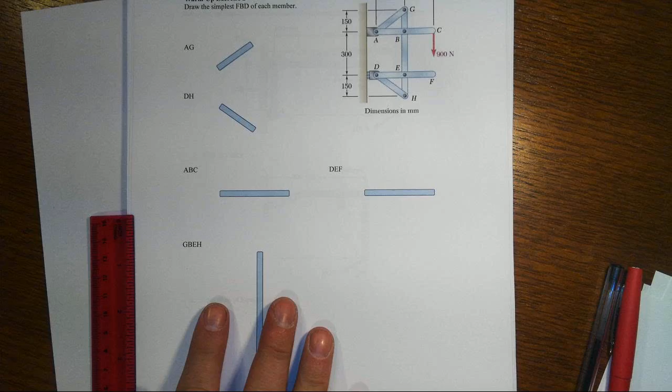Alright, in this next warm-up exercise for frame and machine analysis, we have a pretty complex situation here. We've got 1, 2, 3, 4, 5 members that are all pin connected in a fairly complex arrangement.

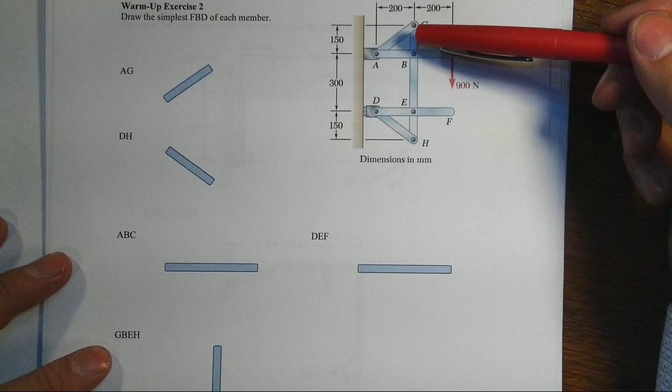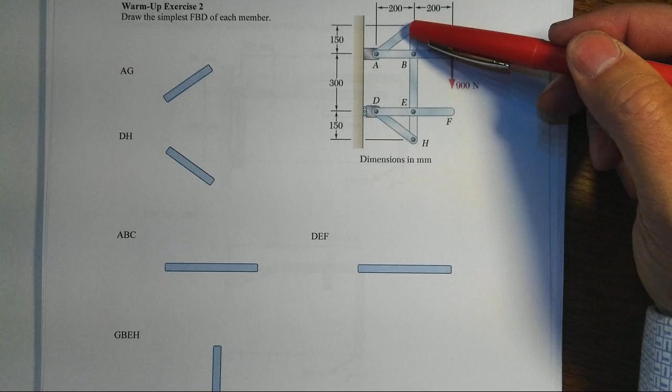Now it's 5, not 6 or 7, because this vertical member GBEH is not joint to joint to joint, but one long continuous member, which is suggested to us by not seeing little circles that indicate member GB just stops there. It is suggested that we've got these overlapping situations, the straight lines going all the way through. The subtleties of these drawings will be crucial in your interpretation of the system.

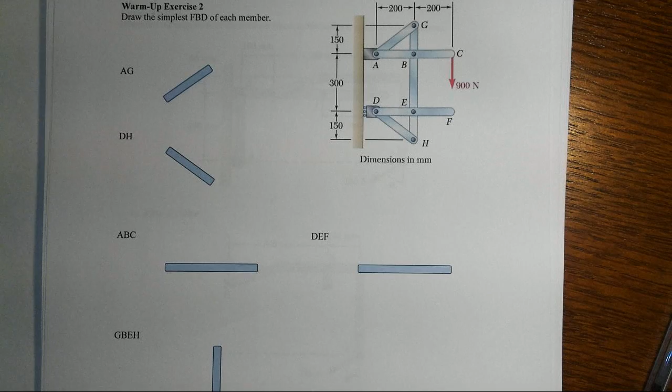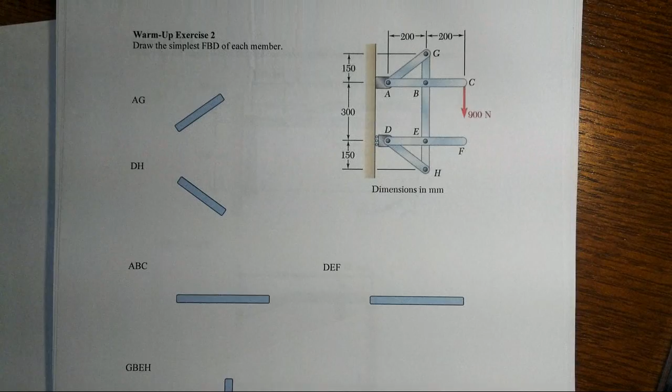And indeed, any other way to try to interpret this system, you'll end up with a system that's not stable. So we actually have 5 members, and you see down below 1, 2, 3, 4, 5 members are shown, and we've got to think about starting to pull these pins and trying to figure out what's going on.

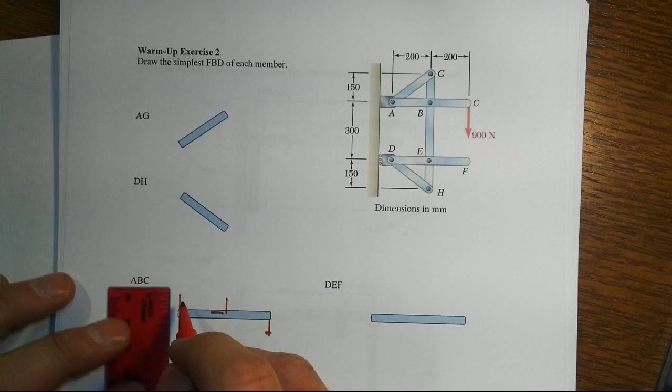I suggest we start with member ABC because that's where the load is applied, and we're going to do a variety of things here. We're not just going to come along and say well at B there's a pin, so we'll put a horizontal vertical component. We can do that, but I don't know what direction they are, so let's try to figure out what some of these directions might be.

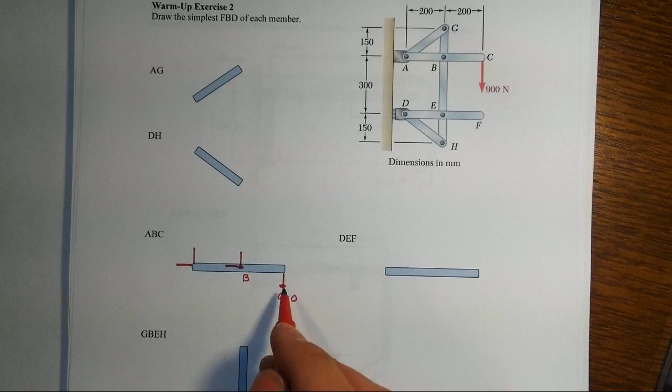For instance, if this is point B and I sum moments about point B due to this 900 Newton load, then I know, given the equal moment arms from A to B and B to C, that this force over here at A also has to be 900 newtons going down.

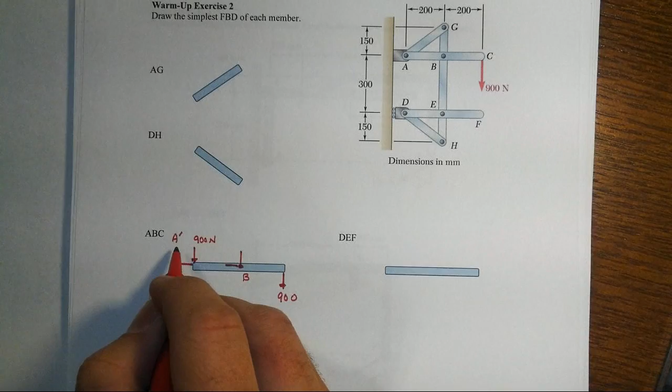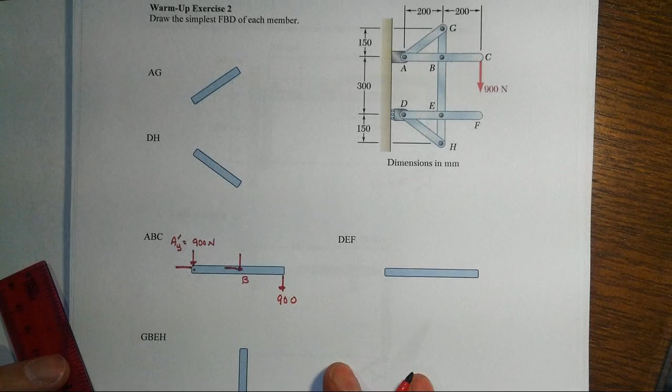Now that is on the end of the member, not at the joint itself. Really close, but not quite. You'll see that in a second when I look at this reaction at A about why I'm calling it somehow a little bit different there.

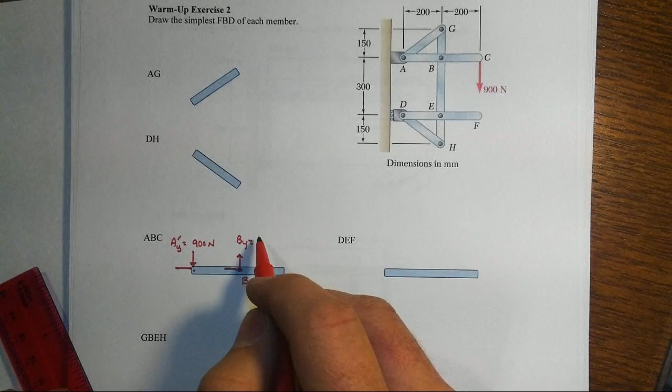Now, I don't know what's going on with the two X components here other than I know they're equal and opposite in direction, but I'm just going to leave that go for now. But note here, sum of forces in the Y, or you could sum moments about point A, you could find out that BY has to be equal to 1800 newtons.

And you say, well, why didn't you call that BY prime? Well, because in this case, with GBEH, this B is not a support. It is just a pin that goes in between two members.

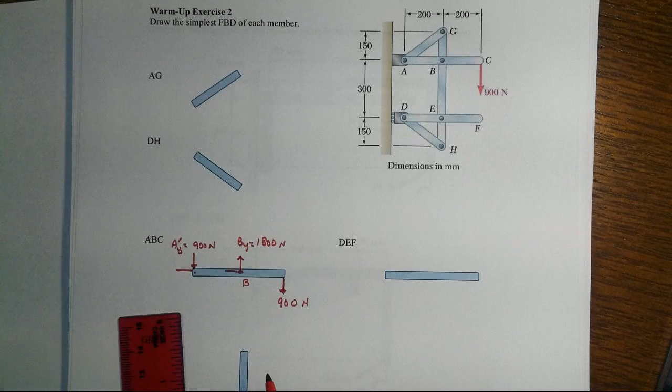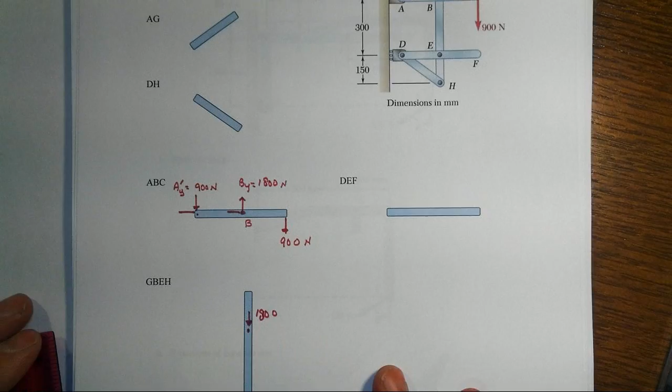And I'm going to come down here immediately to point B on this long vertical member, and I'm going to turn this 1800 around in the direction that member ABC puts a force onto GBEH. So these two need to be equal and opposite, because when we put them back together they should vectorially disappear.

We're also going to have a potential horizontal force there. I haven't figured out what that is yet, but I don't want that to go completely away. Alright, well, that's a little bit of what's going on here, but this gets even more complex, right?

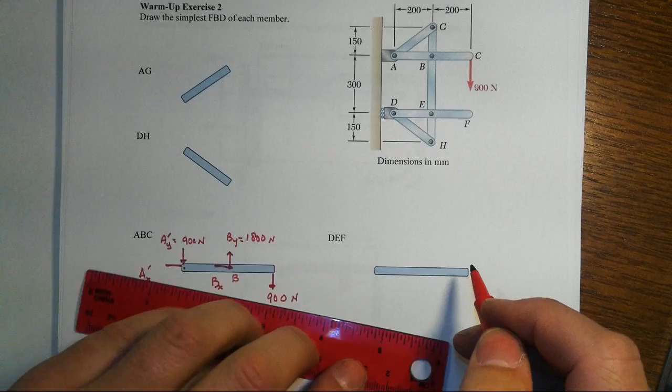I don't know what's going on yet with AX nor BX, other than I know that they're going to be equal and opposite. Let's look at this member DEF. No applied force, so all we have is a possible vertical and horizontal at where the pins are located.

Well, wait a minute though. That's a pin-connected member, and if I sum moments about D, then I'll know that thing has to be 0, right? And if I sum moments about E, well, then that vertical or perpendicular has to be 0. So this is a two-force member.

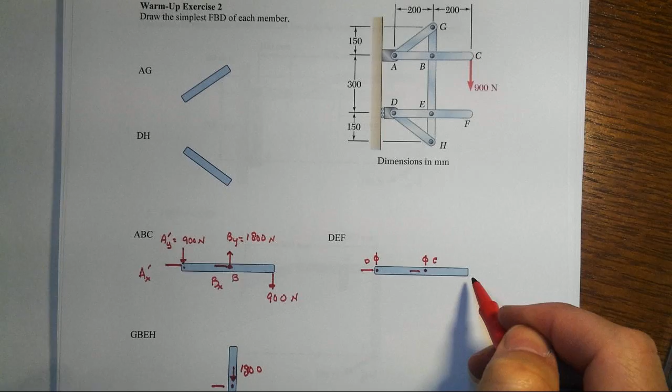Pin, pin. Doesn't have to be at its ends. It just has, it's got 2 pins only, and it's got no other applied forces to it other than at those pins. So that has to be a two-force member.

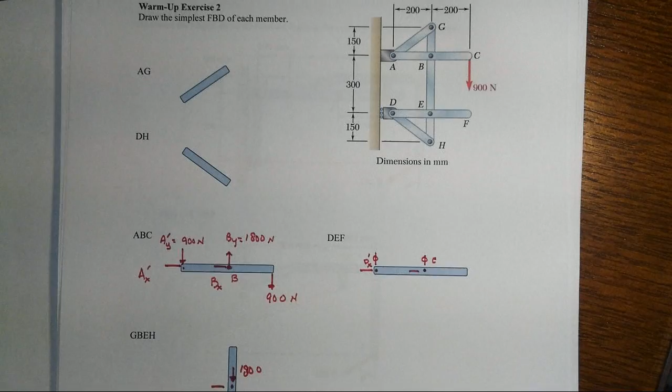Again, I don't know anything about the X component, and that's at a support, so I'm going to call that DX prime. And then I do know that EX will be opposite of this DX prime, but that's all I'll know. So let's go and talk about those little pieces here, and let's actually start with this support right at D.

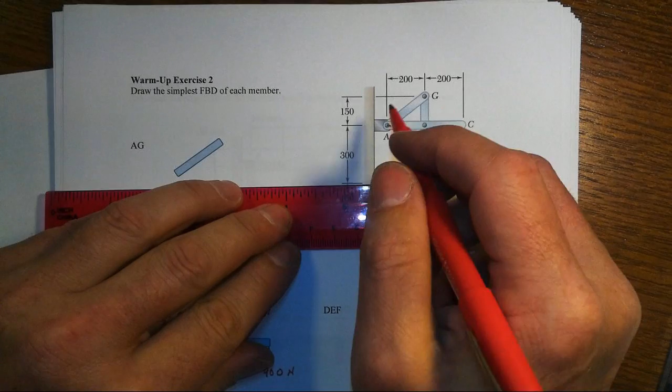And I'm going to again superimpose things right off on top of the global drawing. If we were to sum moments about point A, then the 900 newtons wants to spin in a clockwise fashion about point A, and that means our roller support here at D, our true DX support reaction, has to be going to the right in order to make that happen, right?

And notice the moment arm of 900 is 400. The DX has a moment arm of 300. That means it's closer, so that would be 4/3 of 900, so that would actually end up being 1200. I just summed moments in my head about point A, but for sure that direction has to be that 1200. I'm not going to show that down here, right?

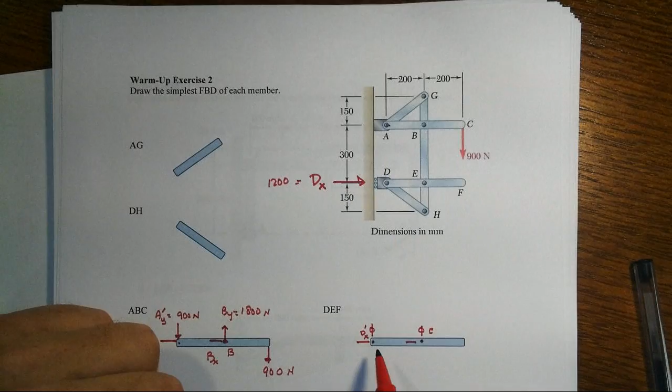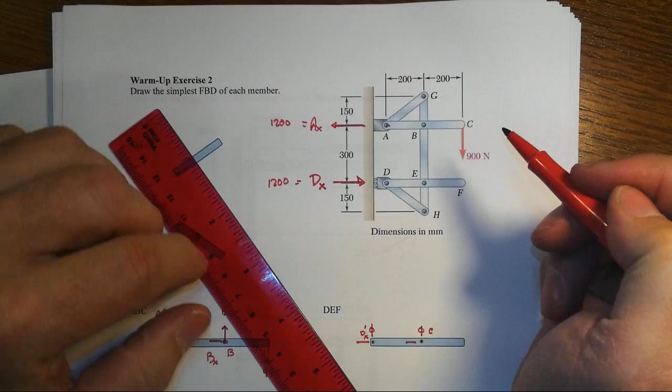I want to finish off the reactions first. So AX will, of course, be opposite of that DX that we just found, so that's also 1200. And the only vertical reaction we end up here is AY, and that would, of course, have to be equal to 900 for translational equilibrium.

So we get both translational x and y, and we get sum of moments being satisfied here, and all that has to equal to 0.

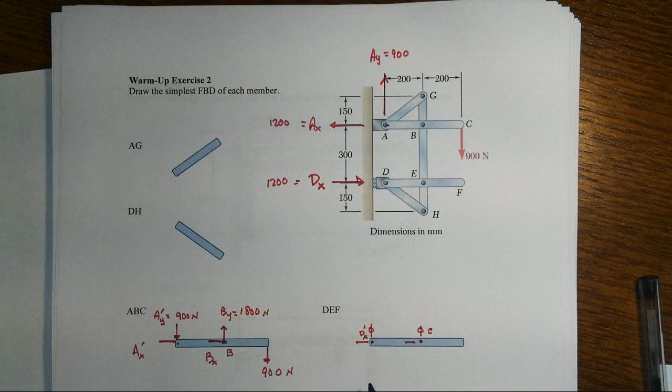Now let's go back and look at this little support here at D. I'm going to show, in this case, a little support, and there we go. There's the little thing that we were indicating was the support. And so we've got our global reaction of 1200 acting to the right on that thing. And then we have this member DEF.

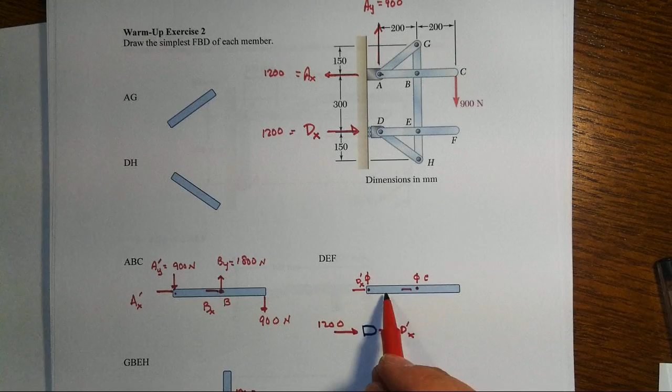Now, we already know that the dy prime is 0, but we also know that we've got a dx prime. That's coming from the member DEF going into that support. That's why I've differentiated these a little bit.

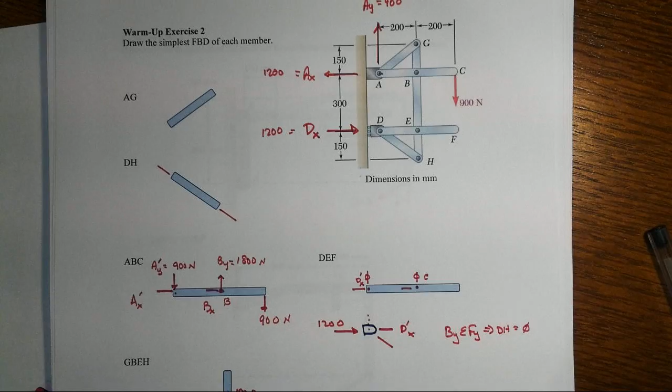Now look at what happens with DH. Pin connected member, no loads applied to it other than at the pins. That's got to be a two-force member. Well, if that's the case, by summation of forces in the y, it's the only thing with a y prime. This thing was 0, so it's not there. So that makes DH equal to a 0 force member. It's not just a 2-force member, it's a 0 force member.

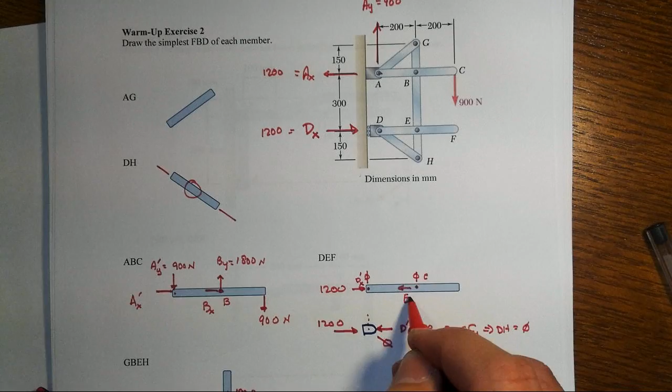And that makes dx prime then somewhat trivial. That's got to be 1200 acting to the left on the support. That means the support acts to the right on the member, and that means over at E we've got to get EX equal to 1200 newtons also acting to the left.

We just found another one. We have to come over here. I don't know if you can see this. Yeah, barely. There's E. We just found out that is acting to the right at 1200. We know the vertical is 0 here, so I'm not going to show anything. And, well, yeah, I guess I will. I'll just show it like that.

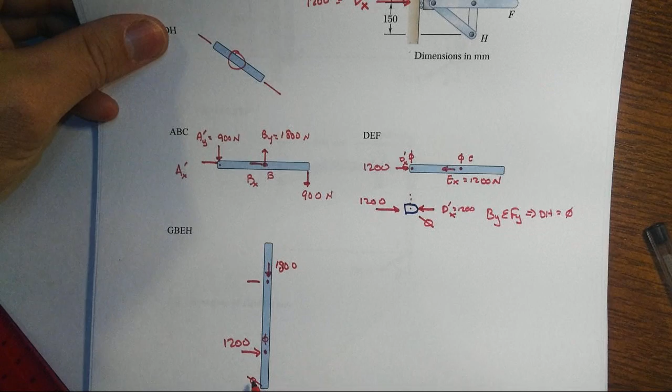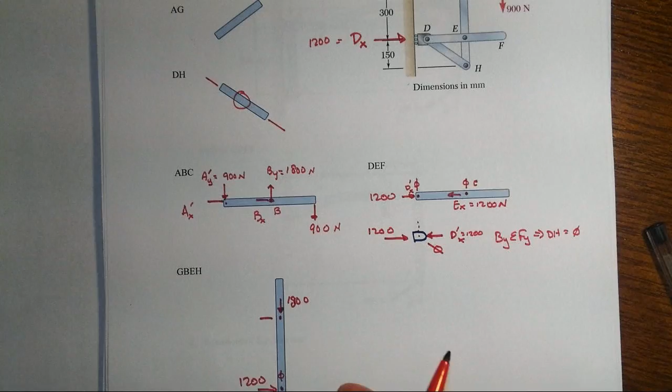That's 0. And we know down here, DH, that was a 0 force member. Wow, that's kind of interesting. Didn't expect to get all this all at once. That almost gives us a complete free body diagram from GBEH, but hey, wait a minute, we got another member here.

AG is going to be, it's a 2-force member too, right? Pin connected, no applied load to the member itself, so it's got to be 2-force in between.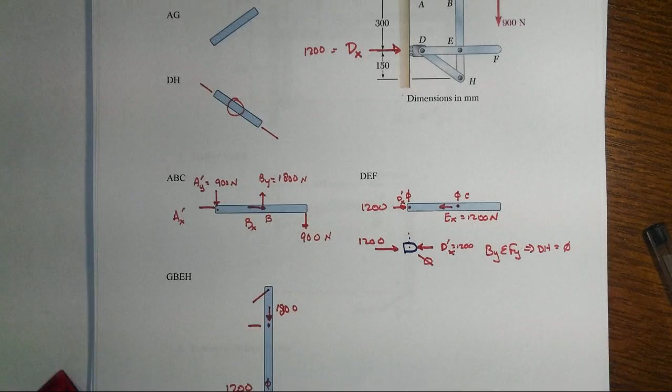Now, when we look at this free body diagram, note what's going to happen here. We've got an 1800 going down, so that means the vertical component of AG has to be going up, and actually now we know it's going to be 1800 in that component. And then we also have the 1200 going to the right. Notice the ratio here that we have on the sides of that potential triangle.

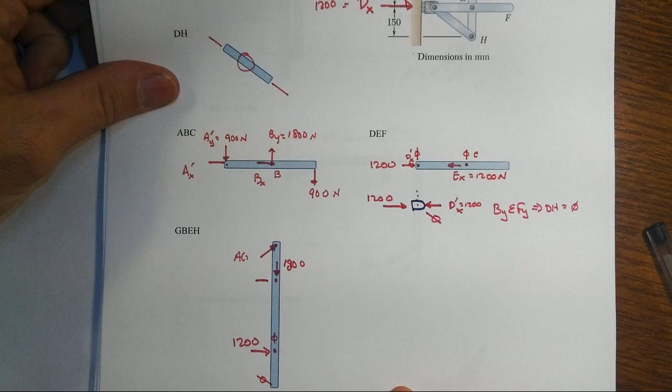I don't like this. Why do I not like this? I thought I was in a conundrum here, but we're okay. Look at this. 1800 going down means that the y component of AG would have to be 1800 going up. It's a 3, 4, 5 triangle. I don't know what that means about the hypotenuse, but it does mean its horizontal component acts to the right.

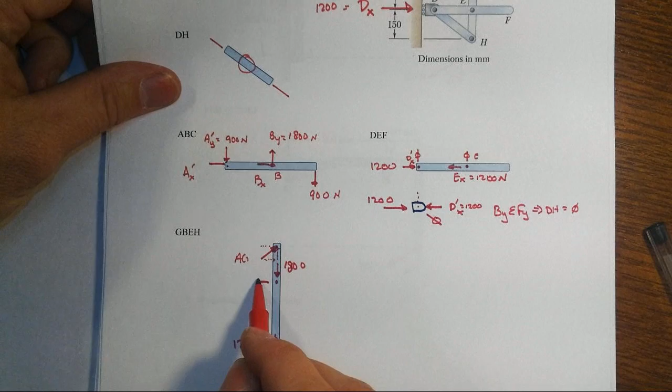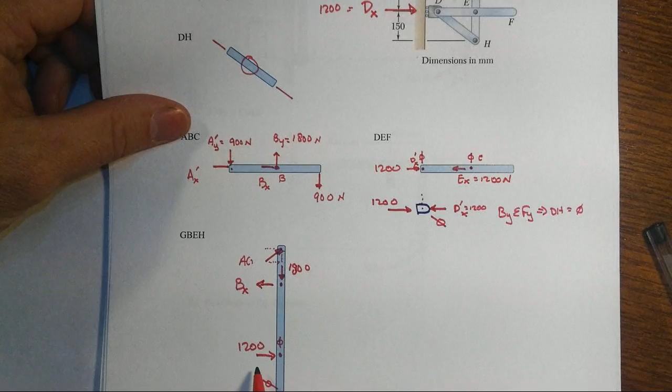The 1200 goes to the right, but we do have a possibility of a reaction or a force at BX, and that's going to be some big number, the sum of both the AGX component and the 1200. And it means when we come up to this one here, BX has got to be going that direction, and A prime X is going that direction.

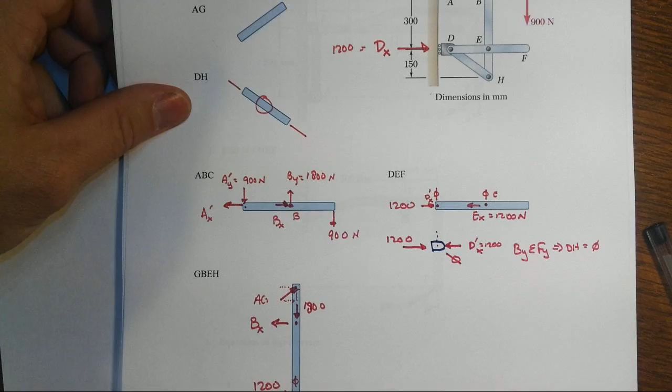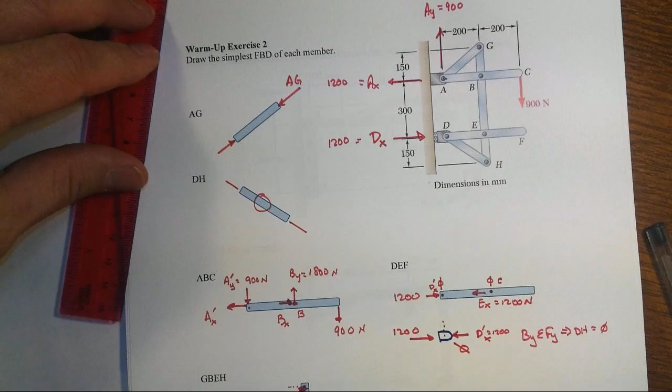And let's see what that does to us at the support at A. So we found a bunch of things out here. We need to kind of catch up a little bit. We found out that the diagonal AG is in compression. We know how to go find it. We know that its vertical component is 1800. We found that down on GBEH.

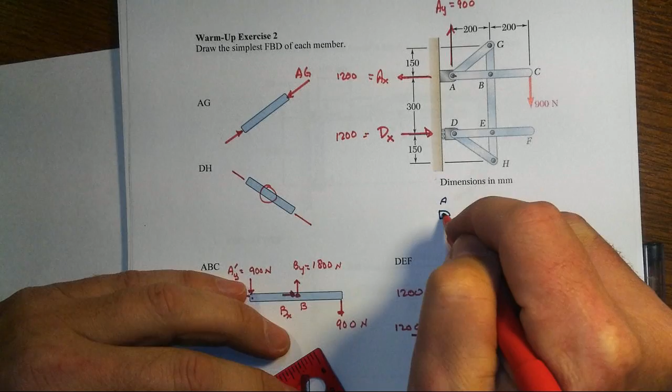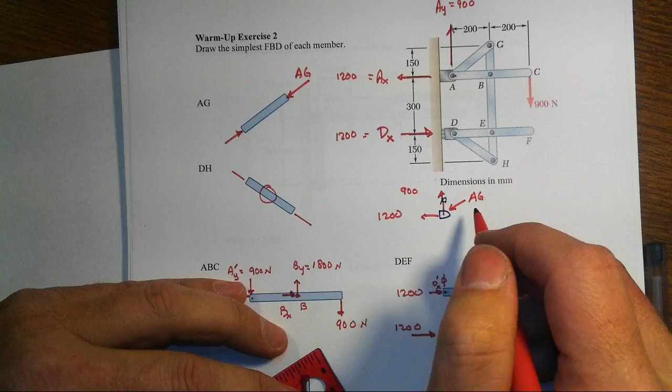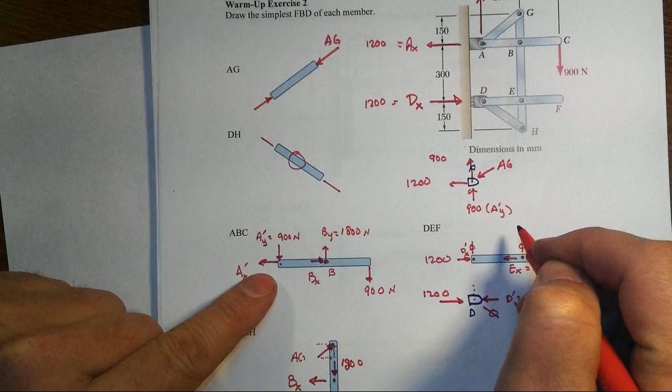But now let's go do a little free body diagram of the support at A. We know we have a global reaction 900 going up. We know we have a global reaction to the left of 1200. We know that we've got AG coming in at a 3, 4, 5 diagonal coming downwards to the left, pushing on the joint. We know that ABC is going to then, let's see, the support is causing 900 newtons on that member, so the member is causing 900 newtons. That's A prime Y. And now there is A prime X going this way.

And now you hope when you do all the math that that will actually sum to be equal to 0. If not, we know we've made a mistake somewhere along the way. Wow, that's a lot.

Oh, hey, this is kind of cool. Look at this. 900 plus 900 is 1800. And we said the vertical component of AG was 1800. That's starting to sound really good, that this is actually working out the way it should be once we start to do all the math.

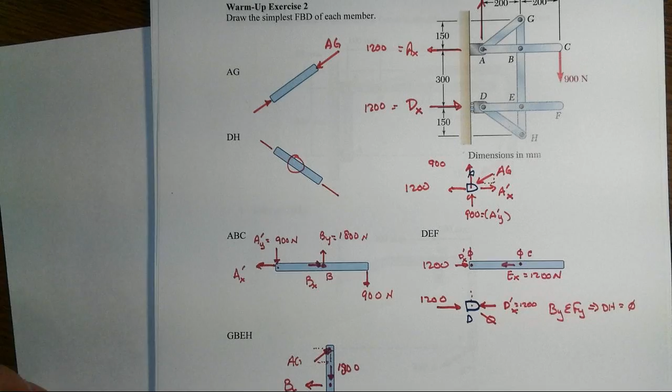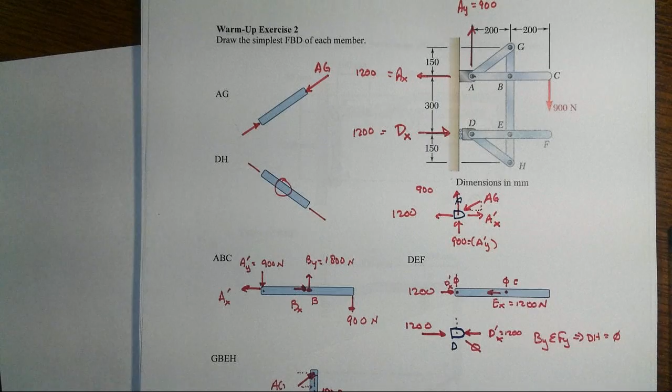But note how complex the free body diagrams became. Not really the free body diagrams, but figuring out what to do with them. We had to draw sort of almost all 5 members' free body diagrams and start to look at little pieces, look at the global equations of equilibrium and free body diagram together, and pull all that together at various little pieces, chopping away at it little bits at a time to begin to figure out how to start to find out the various forces that are in each of the components. Yeah, they're complex. This is not easy.